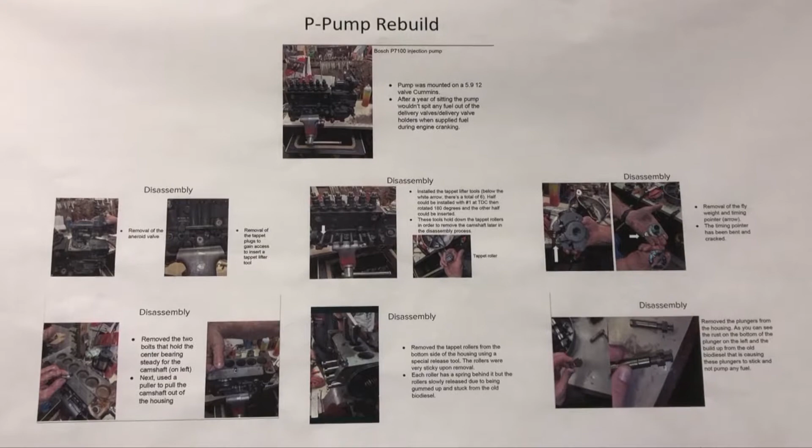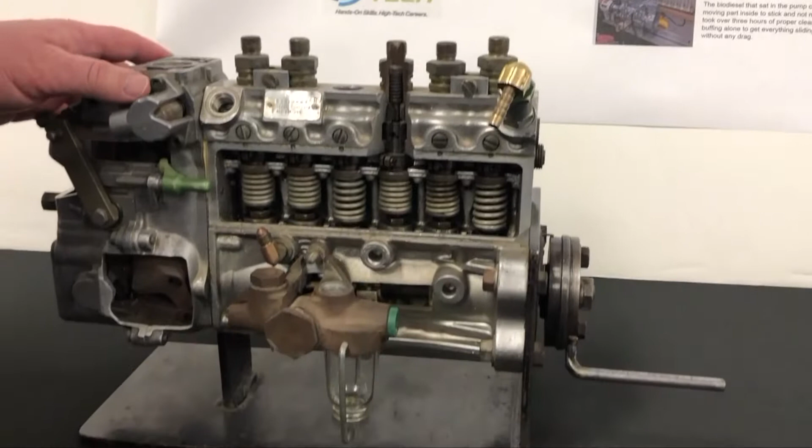The reason we're here today is to work with the consortium on biodiesel. We took some students down to Diesel Specialties in Hutchinson, Kansas to rebuild an injection pump, to show the effects of biodiesel when you don't use it correctly, or when it's improperly mixed or produced. We're here to show what it does to the parts and what problems it causes if you don't use it correctly, mix it correctly, or the blend is wrong.

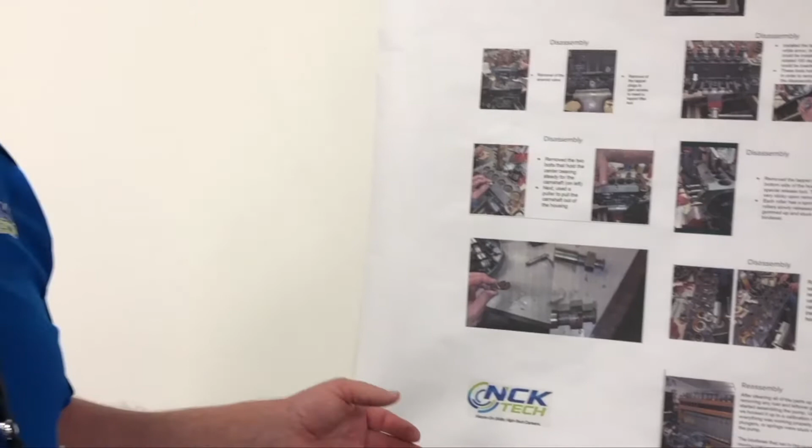It's just a matter of how the pump reacts to it. We actually had a pump that was locked up from using biodiesel, because when you let it set, it gums up and varnishes, and that's what shuts down the pump. So we sent a couple students down there to rebuild this pump, and that's what we're here for today, for them to explain what was stuck, what causes the problem, and how to fix it.

That's part of our program in Beloit, to teach biodiesel and alternative fuels, but the primary focus is diesel technology out of Beloit, Kansas.

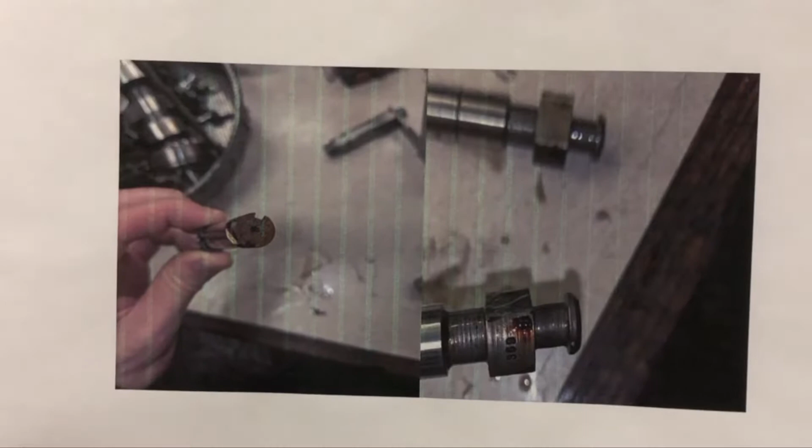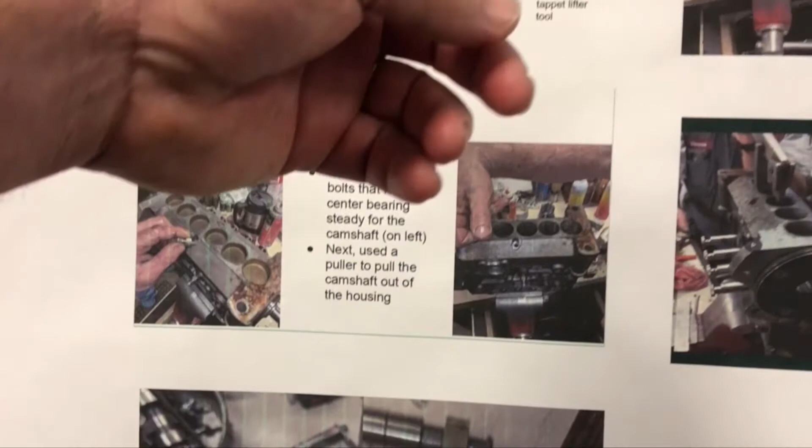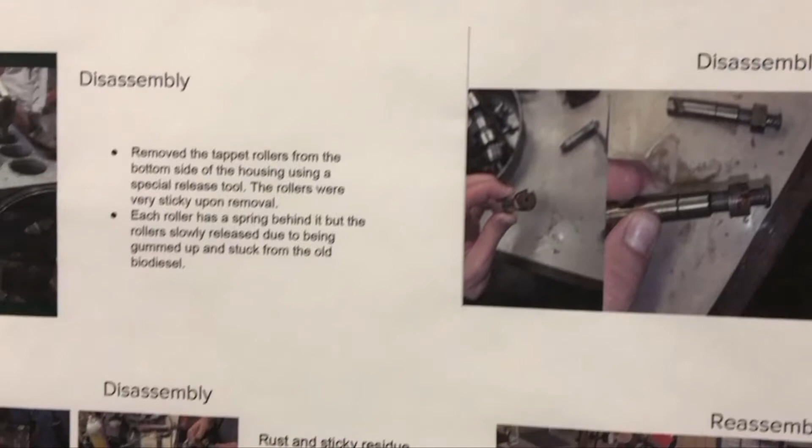Through the process, they saw the plungers, which were all gummed up with varnish from setting. If you let biodiesel set, it gums up and turns to varnish. It just shows on your rack. They were showing, like earlier, Mark was over here, the guy who helped him rebuild it, the guy who owns the shop, telling them how these different components lock up.

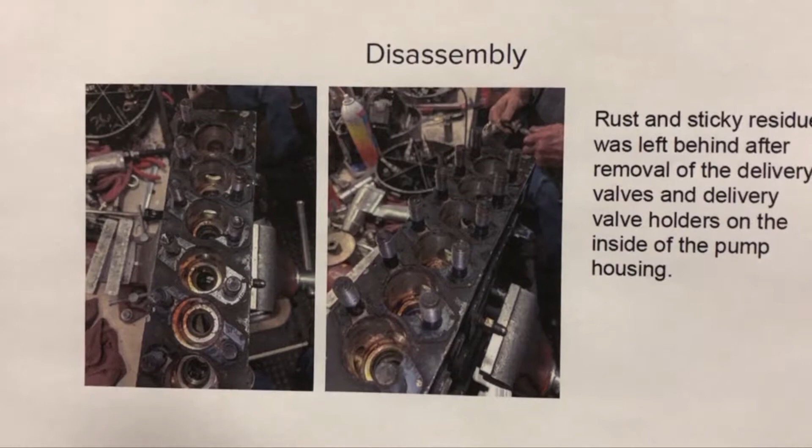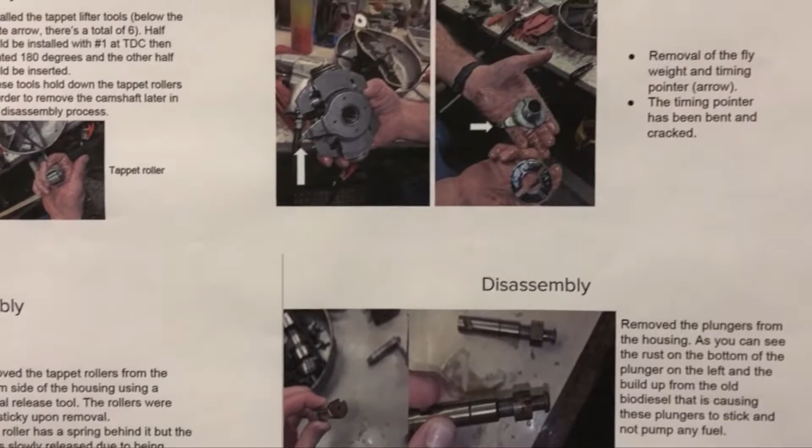They varnish real bad, and it almost takes tools to pull them apart when they stick. He showed them the tolerances, how to measure everything, how to clean everything, and what it takes to rebuild one after it's sat for too long.

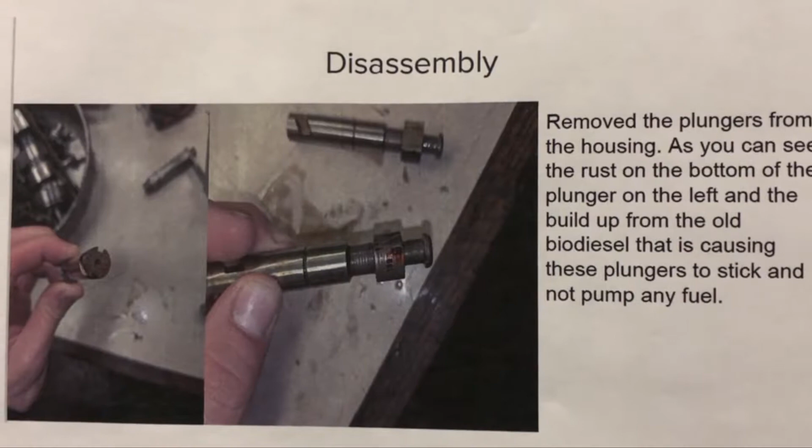It's just a disassembly and assembly process that they went through, and it took them approximately a day and a half, with two students down there doing it full time, cleaning, reassembling, and learning how to do it. Later this year, we're going to send a couple more down to do another pump.

Our responsibility is to test the machinery, how it operates, what it does right, what it does wrong, and what can go wrong with the components when it's not used correctly, mixed correctly, or when the blends are wrong. That's what we're trying to do in the future.

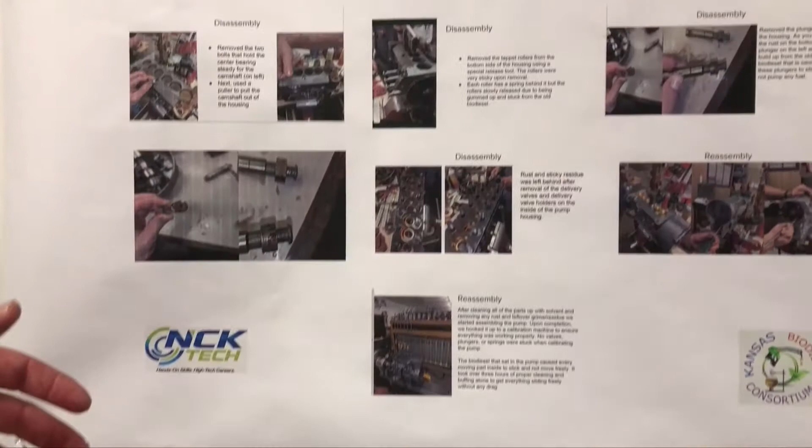We were a small production up in Beloit, but now I've talked to the Soybean Commission, and they've agreed to fund us for testing the equipment. We're going to turn all of our stuff over to Seward County for making it.